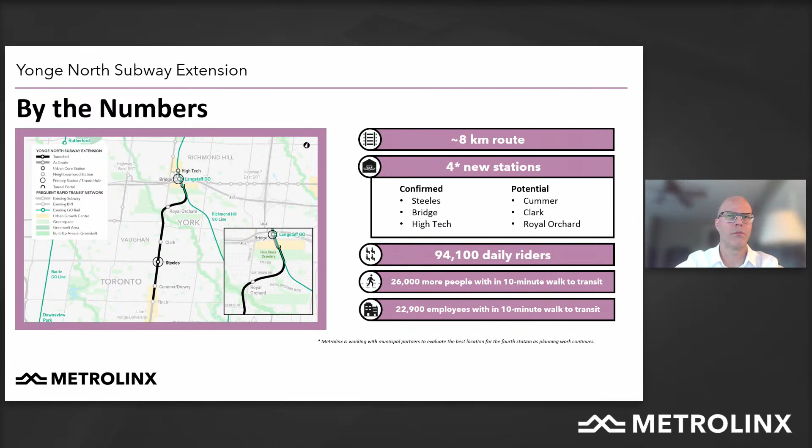Some of the key benefits of our business case and our project include almost 100,000 daily riders, and tens of thousands more people and jobs within a short 10-minute walk of the subway service.

The demand for travel along Yonge Street requires more than 3,000 buses to meet people's mobility needs. The Yonge North Subway Extension will give these people a rapid transit option and save them 22 minutes each way on their trip from York Region to downtown Toronto.

The 94,100 daily riders will share a combined 835,000 minutes saved from their daily travels, allowing them to put this time to better use. The extension will also reduce the total distance traveled by cars during the morning rush hour period by 7,700 kilometers. Over a single journey, that would be like driving from East Gwillimbury to the boundary of BC's Yoho National Park and back again. So a real project that is going to help manage the ongoing congestion problem we have along the southern and northern boundaries of York Region and the City of Toronto.

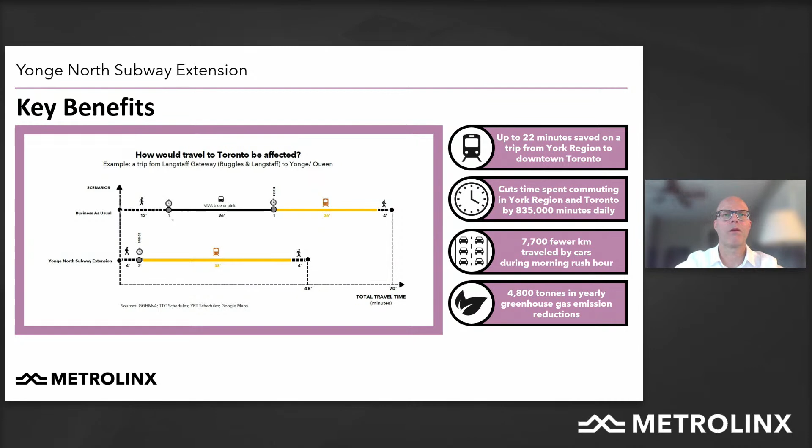Our stations at Bridge and High Tech are placing the transit services where the highest number of people will be living and working. Bridge Station is a key hub with significant transit network integration, supporting efficient connections for people transferring from the Yonge North Subway Extension to other transit services, and placing convenient station access close to where tens of thousands of people will live and work.

High Tech Station, although close to Bridge Station, will place the station centrally to a significant growth area, bringing half the people who will call Richmond Hill Centre home within a short walk of the station. By using the existing rail corridor and the space between Highways 407 and Highway 7, we've optimized the use of that scarce land resource, freeing up precious land for other more productive community building uses. The combination of Bridge Station and High Tech Station, serving different communities and functions, is considered a key driver of our benefits, bringing transit closer to where the highest number of people will live and work.

Through our initial business case, we completed detailed studies on three alignment options. Option 1, the EA alignment many of you will know from past work done by York Region and the City of Toronto, travels along Yonge Street, fully underground, and shifts easterly just north of Holy Cross Cemetery. This alignment can accommodate 3 total stations within the available funding. Option 2, a slight refinement of the EA alignment, allows for a different station placement location while fully underground, and because of the underground construction, its cost profile can only accommodate 3 total stations within the available funding.

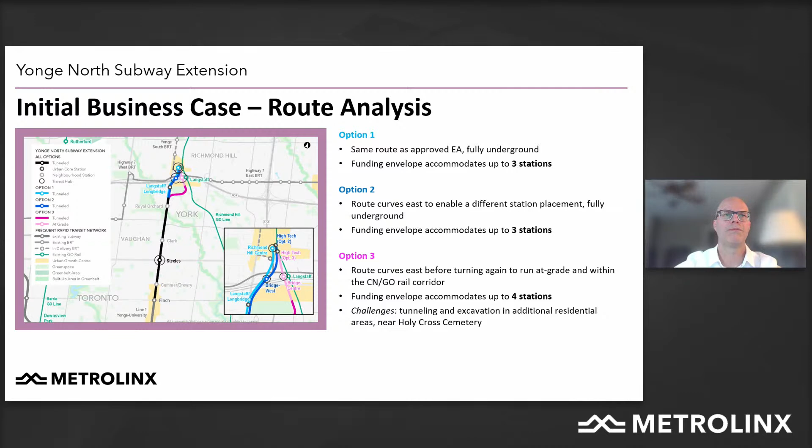Our project is moving forward to deliver this important transit service. We are advancing the next phase of our business case process, referred to as the preliminary design business case, and we have that scheduled for completion in the fall of 2021.

We are also moving forward with the initial procurement stage of the main project contracts. While this procurement will take over 2 years to complete, we are also working on early works construction projects that are designed to both accelerate the delivery of the project and de-risk the main contracts.

Two early works projects that we've identified so far are some modifications at Finch Subway Station to ensure we have a good interface between the Yonge North Subway Extension and the existing Line 1 TTC subway service, and what we're referring to as the launch site, where we plan on launching the tunnel boring machines for building the subway tunnels, up at the north end of the project in the Langstaff Gateway area.

I'd also like to highlight that we are preparing an addendum to the original environmental assessment. This addendum will include a public review and comment period, scheduled to start this fall. James Francis will speak in detail about the EA addendum, or the environmental assessment addendum, and the public consultation program as part of his next slides.

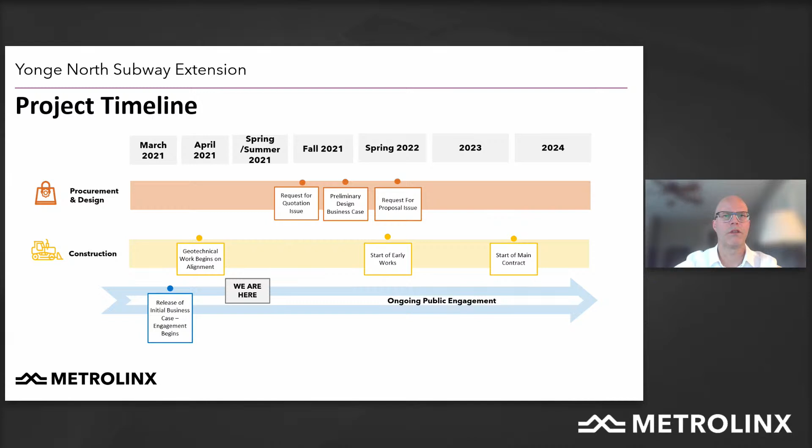Our ongoing public consultation is planned to continue through the planning, design, and construction phases of the Yonge North Subway Extension. To date, and many of you have participated in them, we've completed virtual open house events, stakeholder meetings and sessions with individuals, landowners, ratepayer associations, and non-government organizations. This is all since our initial business case was released, as part of our consultation and engagement process.

This work has been really informative and valuable for our team. In addition to the ongoing community engagement work we're doing, we are launching working groups with community members and our project team called Community Liaison Committees. The first one being pulled together is for the Royal Orchard community, and more information will be shared on that in the coming weeks.

As part of the environmental assessment process, we aim to begin consulting on specific items, including results of our existing condition studies, results of our impact assessment study, and solutions proposed to reduce those impacts, of note our noise and vibration. My colleague James, as I mentioned, is here to present the work plan for the EA addendum. I'll now turn it over to him to take you through the next few slides.

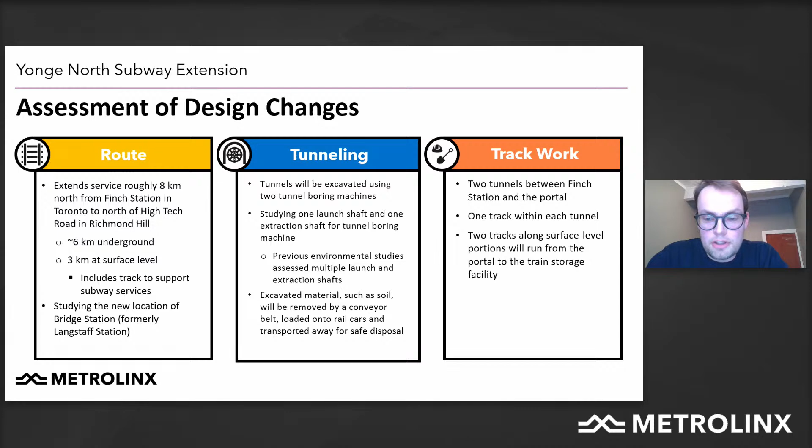We're also assessing changes to tunneling. We're studying a solution that has one launch shaft and one extraction shaft for the tunnel boring machines. The previous environmental assessment assessed multiple launch and extraction sites. We're also assessing the track work within both the tunnel and the at-grade segments, as well as at the train storage facility. Next slide, please.

One of the other design changes we're assessing is the at-grade train storage facility, planned to accommodate up to 15 six-car trains. As a result of the route changes, we anticipate some potential shifts in locations of traction power substations and emergency exit buildings compared to what was previously assessed in the 2009 Environmental Project Report.

Traction power substations are required at intervals along the route to provide power to the subway system, and similarly, emergency exit buildings are required at intervals along the route to provide safe exit or egress from the subway in the event of an emergency.

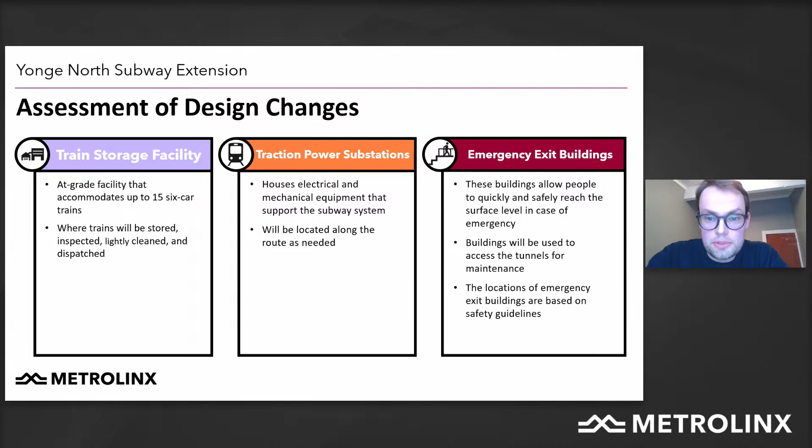In our ongoing environmental assessment work, we're looking not only at the design changes compared to the 2009 Environmental Project Report and the 2014 addendum, but also at existing environmental conditions throughout the entire study area. It's been more than 10 years since that assessment was completed, and we're taking a holistic, complete look at all environmental conditions from tip to tail to make sure we fully understand the context in which the project will be constructed and operated.

We're looking at all the typical factors examined in an environmental assessment under the transit project process, including the natural environment. We're undertaking plant and tree inventories, looking at fish and fish habitat, breeding birds, wildlife, and species at risk. For cultural heritage, we're looking to see if there are any additional listed or designated heritage properties in the study area since 2009.

For air quality, we're looking at the latest data available from provincial and federal air quality monitoring stations. For noise and vibration, we're measuring current levels, which set our target for our noise and vibration solutions to manage the effects of the project. And for traffic, we're getting the latest data about service levels at intersections and congestion in the area, so we can best plan both construction and future operation.

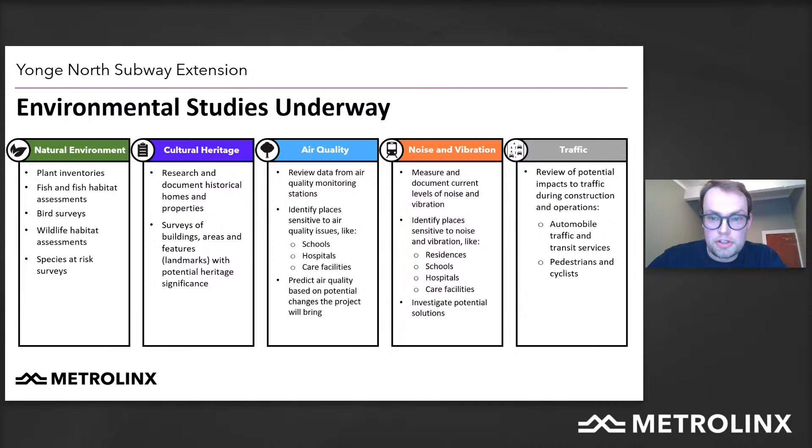We're also looking at land use and socioeconomics. As part of that study, we're reviewing how the land in the study area is used, as well as plans for future development, and identifying land use and socioeconomic features such as places of worship, bicycle and pedestrian routes, multi-use trails, and parks. Our last main study in the environmental assessment addendum is archaeology.

In this study, we're looking to see if any additional archaeological assessments have been completed in the study area since 2009. We're going out into the field to check if there are any remaining areas that retain potential for archaeological resources, and we'll be working with Indigenous nations as we advance that work.

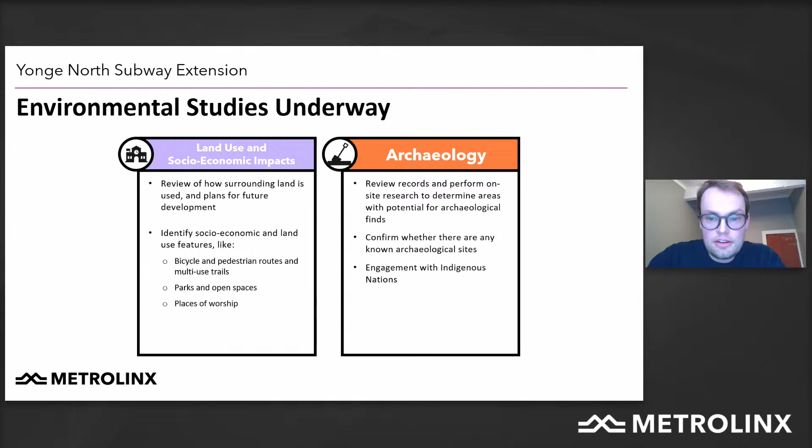In terms of ongoing and upcoming environmental activities, you may have seen our staff out in the field collecting data. We've been collecting noise and vibration levels, and in the last week undertaking frog call surveys. In the coming weeks we'll be surveying for breeding birds, taking inventories of vegetation, looking at fish and fish habitat and potential habitat for species at risk, and looking at properties to identify potential cultural heritage value or interest, with this work ongoing in the coming months.

We'll document all of that work in our Environmental Project Report addendum, which we'll make available for public review and comment. That period kicks off when we issue our notice of the EPR addendum, meaning the document will be available on our website for review and comment. We're planning a 30-day review period, after which Metrolinx has up to 35 days to respond to comments and update the EPR addendum based on what we hear.